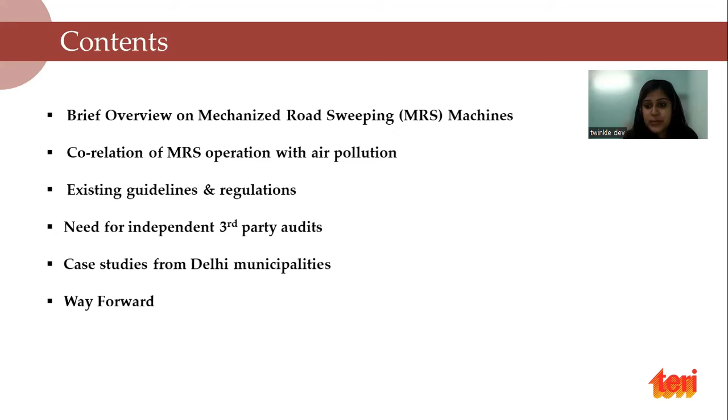So moving forward, the contents of the presentation have been highlighted in this slide. We will be talking in general about what exactly mechanized road sweeping machines are, how they are particularly designed, what things should be kept in mind by urban local bodies while deploying these machines on ground, and how these MRS machines are related to the air pollution aspect. We'll also cover existing guidelines and regulations in place for MRS machines, the need for such independent third party audits by municipalities, and case studies from Delhi municipalities as well.

The main objective of preparing this presentation was to sensitize all of the participants attending, to make them aware of what exactly a mechanized road sweeping machine is and how it operates, what parameters are kept in mind, and how it contributes in real sense to reducing air pollution from our environment.

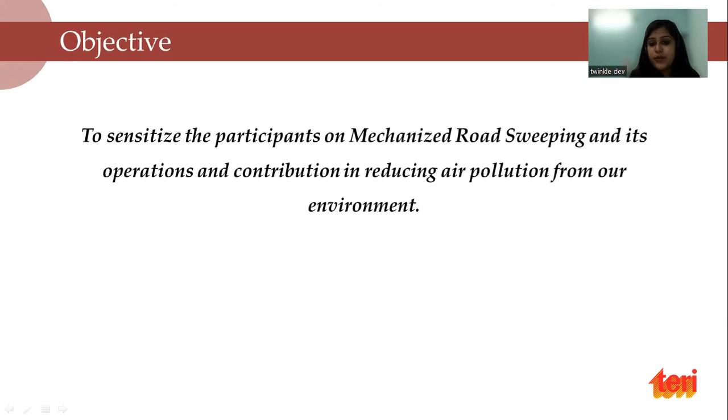So what exactly is a mechanized road sweeping machine? As you must have observed while traveling, you must have seen huge giant trucks moving on the road really very slowly, with a huge broom kind of thing below sweeping the road. These are nothing but the MRS machine, the mechanized road sweeping machine.

All these MRS machines are truck mounted and have vacuum suction engines, also known as auxiliary engines. Machines also have side and central brushes on the sides and in the front, and a few machines also have sprinklers present at the back, with the purpose of suppressing the dust during sweeping operations through water sprinklers. These machines are capable of sweeping one side or the central side of the road at a time.

So these machines are either operated with dry or wet sweeping mechanisms. The dry and wet sweeping mechanism machines have been divided into two types: one is of 4.5 cum of vacuum and the other is of 6.0 cum of vacuum. These are the dust holding capacities of these machines. The 6 cum is for machines doing dry sweeping, while 4.5 cum is for wet sweeping MRS machines.

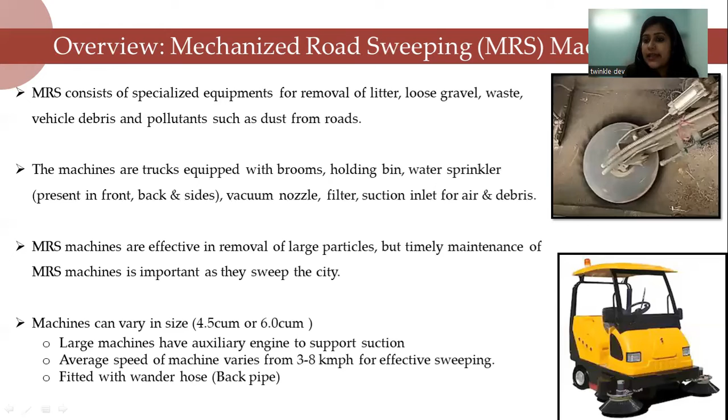So what is the correlation of mechanized road sweeping and air pollution? Dust pollution is a major cause of pollution, not just in India, but worldwide. In India, a huge percentage of pollution arises from road dust in the form of suspended particulate matter. Various sources of this air pollution or SPM originate from brick kilns, construction activities, transport, domestic waste burning, DG sets, etc.

In the era where mechanization and automation are new norms for urban services, due to increasing development and requirements on clean air, mechanization of road sweeping is going worldwide and in India as well. MRS machines are basically certified as PM10 efficient, capable of picking up greater than or equal to 80% of PM10 particles, which stir up from vehicular traffic on the paved roads.

Giving an example of Indore city in India, part of Madhya Pradesh state: it reported a drop of PM10 and PM2.5 by 8.3% to 5% in the year 2018 and 2019 due to the MRS operation only. The city also claimed that after using the MRS operation, the respirable suspended particulate matter also reduced in the city.

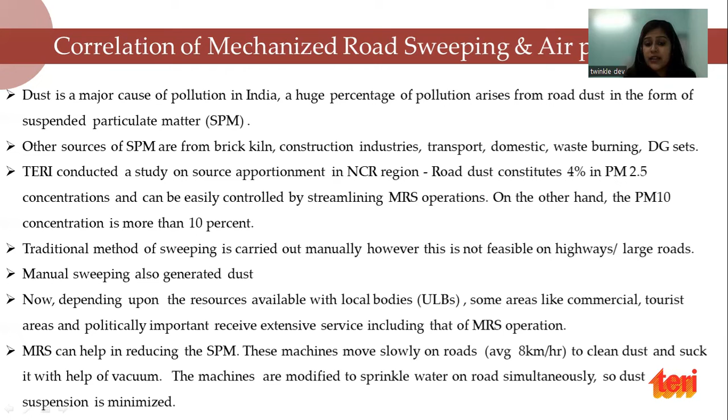So MRS can really help in reducing the SPM. The machines move slowly on the road to clean the dust and suck it with the help of a vacuum. Hence, I think MRS should be deployed by the municipalities on ground.

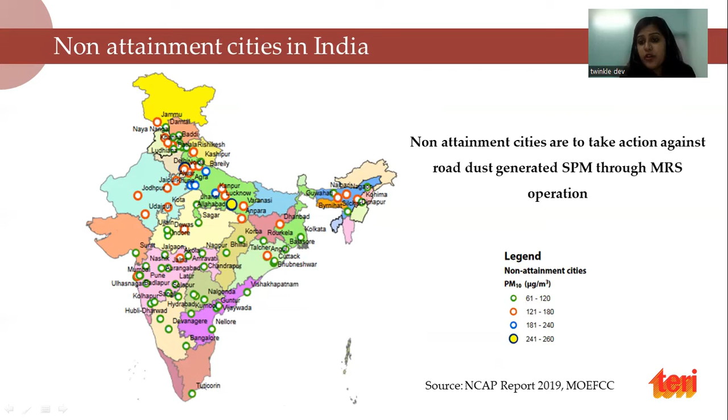What I think is, non-attainment cities should take action against the road dust generated through various different activities, and MRS operation would be a really feasible option. There are certain NCAP action points for pollution from road dust and C&D waste, such as introducing mechanical sweeping on the basis of feasibility studies in the city. So urban local bodies, whenever they are going to introduce their mechanical sweepers on ground, need to come up with a feasibility study to understand the challenges they might face while operating their MRS on ground.

Suppose there are challenges like unpaved roads, and since these machines are really very costly, they might face regular breakdown during their shift hours. So it's really important that municipalities understand certain challenges, whether related to paving of roads, getting diesel on time, or designing routes so dead mileage is reduced, so that these machines can be used to their optimum value and perform to their fullest, helping undertake sweeping operations more effectively.

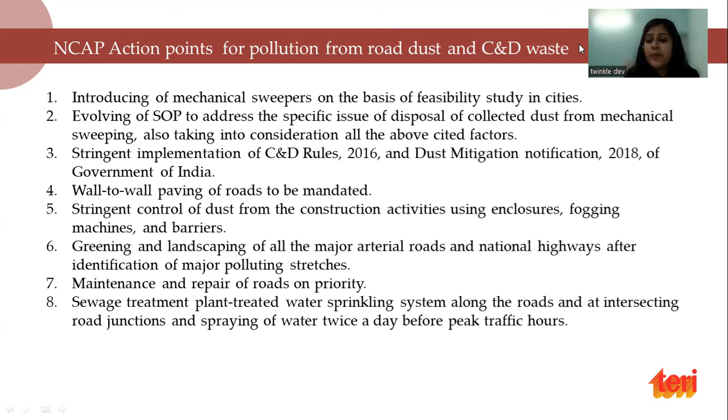There are certain design characteristics of MRS machines which need to be kept in mind, because most of these machines are operated by a driver along with operators who are present with the machine. So the human factor needs to be considered, wherein these machines should be designed with a proper cabin where both the driver and the operator are able to sit properly.

There should be presence of light, because the MRS operates not only during the day but also during night shift hours, so proper lights should be present inside the cabin, and the presence of all lights outside the MRS should also be there.

Functional requirements are also really very important, because whenever the MRS machine breaks down, it should have a certain toolkit with it so operators are able to at least work over the issues while the machine is on breakdown. A toolbox or other things need to be provided along with a fire extinguisher kit for the MRS machine.

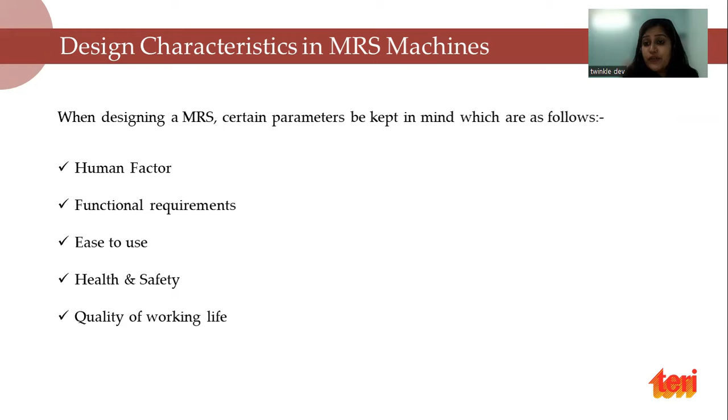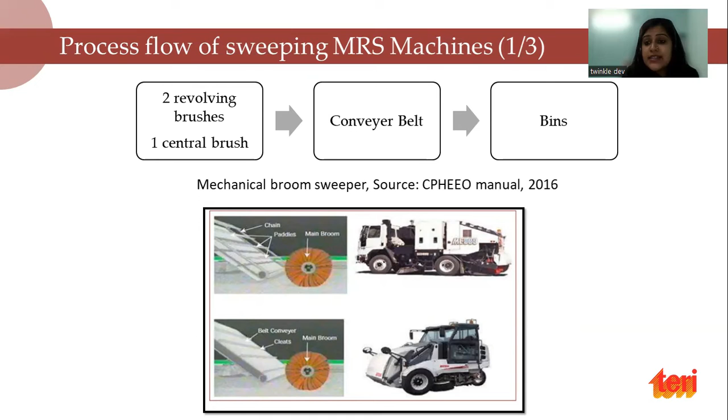In the MRS machine, you can see two revolving brushes and one central brush. One revolving brush is on the right, one on the left, and one in the center. A conveyor belt is present that helps in moving these brushes and also the vacuum, which collects the dust and transports it to the bins.

So what exactly is the working of an MRS machine? MRS, as you know, is a truck mounted sweeper, usually mounted on a truck for its primary movement. Most of the function of the sweeping unit is controlled by an auxiliary engine, as highlighted earlier, responsible for powering the broom and vacuum functions.

During the entire operation, the side and central brushes move the sand and debris closer towards the suction head, which picks up all the debris and collects the dust in the hopper.

The hopper is present at the back. It is a metallic body of the truck, and it opens up at 90 degrees with a hydraulic locking system in place. The controls present inside the cabin make it a really safe and easy system to operate.

The challenging part of suspending the dust on the surface is taken care of by the water sprinklers, which help in suspending the dust on the ground so that it gets easily collected.

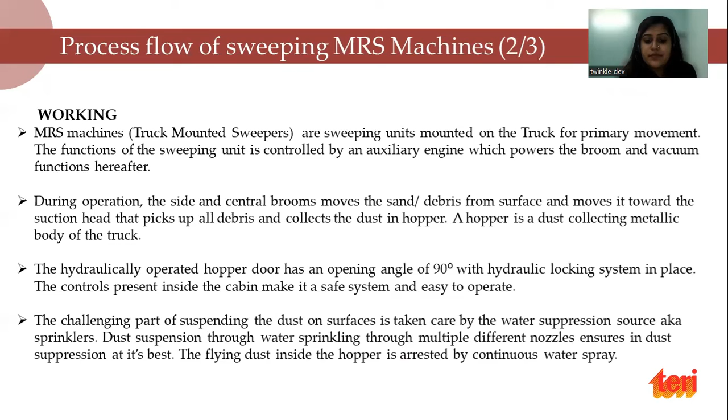The MRS machine has one main broom with excellent sweeping performance every time, and two free floating suction hoods on either side, with the choice of operating any hood independently or both simultaneously. Safety parameters are kept in mind while designing these machines.

The vehicle possesses a hopper load holding valve in addition to the manual safety lock measures. It is also equipped with a high pressure water jet.

The water jet basically helps in cleaning signboards, monuments, paver blocks on walking tracks, barricades, and sometimes when the dust is unloaded at a disposal site, this water jet is really very helpful in cleaning that hopper from inside.

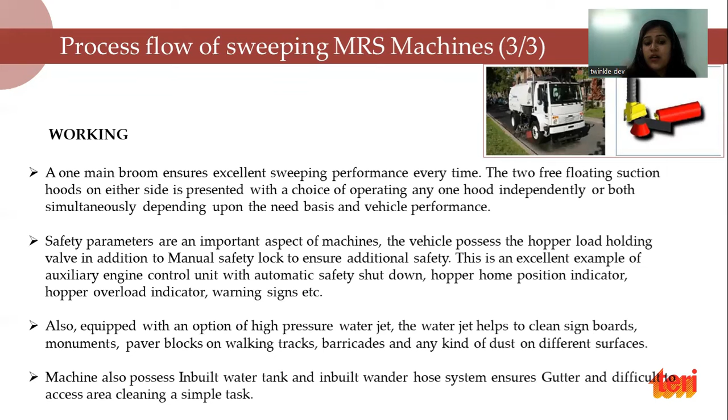The machine also possesses an inbuilt water tank and inbuilt wander hose system that ensures gutters and difficult areas are also cleaned very easily.

There are two types of vacuum sweepers available in the Indian market: one is the chassis mounted MRS, and the other is the self-propelled MRS.

The chassis mounted MRS machine is a power sweeping unit with a container mounted on a vehicular chassis, having hydraulic motors and power controls for driving the brush, suction unit, and jet washing, with an auxiliary engine driving the vehicle. It has a payload capacity ranging between 4,000 to 5,000 kg, with a 4 to 6 meter cube stainless steel or higher grade container for storage of sweeping waste.

On the other hand, the self-propelled one is a self-driven power sweeping machine, a composite vehicle with a container, hydraulic motor, and power control for driving the brushes, suction unit, and jet washing. It has a payload capacity ranging between 2,000 to 3,000 kg in a container of 1.75 to 2.50 meter cube. This is a relatively small machine that can be deployed on both narrow and wide roads.

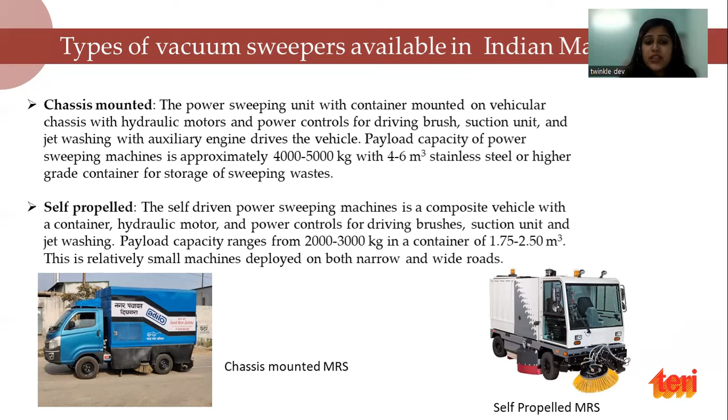It has the advantage that it can move on both narrow and wide roads, while the chassis mounted type is usually used on long and wide roads.

Why exactly is MRS machine sweeping operation required? As per a study conducted by the Center for Science and Environment in 2016, we observed a bifurcation of different sources of air pollution, and road dust in cities accounted for about 38% of the pollution originating from road dust.

This brings us to the point that air pollution is really impacting every aspect of our environment. It's really very important to act upon it, and mechanical sweeping operation is considered one of the most feasible options to do that, as dust gets accumulated on central side verges of the road.

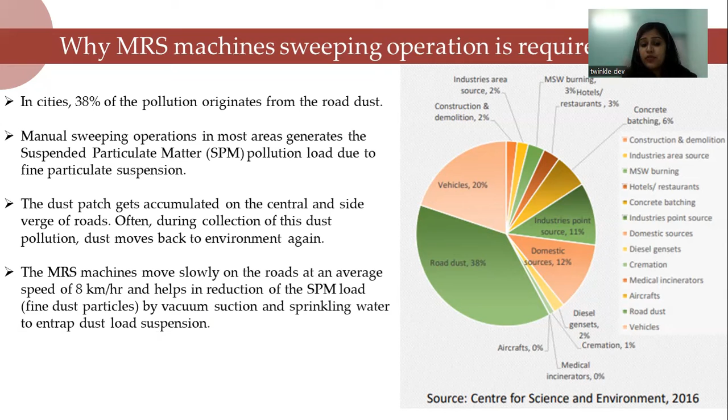Often during collection of this dust it gets moved back. So it's really important that with the help of the MRS machine, this dust is suspended rather than moved back into the environment, so it gets easily collected.

These are some CPHEEO guidelines for urban local bodies and also for the manufacturers.

It's really very important to adjust the frequency of street cleaning by urban local bodies, because geographically speaking, every area or every municipality would be having a different condition from the rest of the municipalities.

It is the municipality's job to actually determine which areas require immediate attention. For instance, residential areas would require sweeping on a daily basis, but market areas or areas where there is no significant dust generation would not require as much street sweeping.

Based on the geography of any area, first the urban local bodies should come up with their own set of frequency of cleaning the streets. Then urban local bodies also need to ensure the safety of workers that are being engaged with the MRS operation.

Most of the time these MRS machines are encouraged to be swept in 2 shift hours, so during the night time it becomes really difficult for the workers, as sometimes the roads provided for sweeping are not fully accessed with electricity or power. So workers should be provided with personal protective gears including belt jackets, reflective jackets, hand gloves, earplugs, boots, and proper uniforms. ID and health cards should be given to them as well.

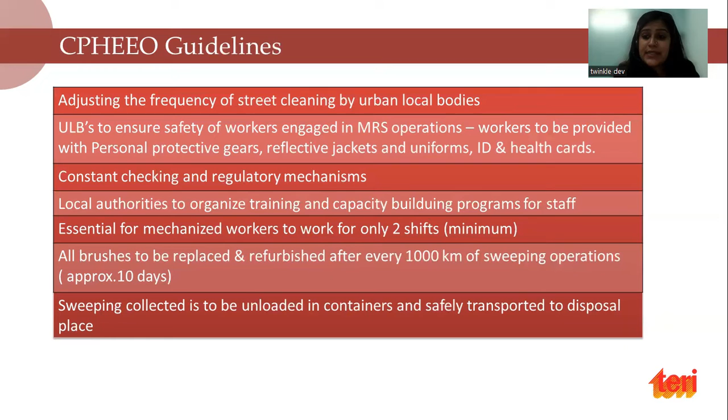This is the suggested sweeping frequency that came in the SWM Rules 2016, and this is the frequency that urban local bodies should follow. But as I told you earlier, geographically speaking, every municipality will have different challenges and situations. So based on that, each municipality should take on the task of curating their own set of sweeping frequency based on the situations they are actually facing.

This can be taken as an example, and they can develop over this. For instance, city center shopping areas would require daily or twice daily sweeping, while market areas, minor streets, suburban shopping streets, or residential streets might require sweeping on a day-to-day basis. Roads or streets with no households or establishments on either side may require it once a week. Highways rarely need sweeping, as motor traffic creates turbulence. Suburban main streets twice a week, and open spaces occasionally whenever required.

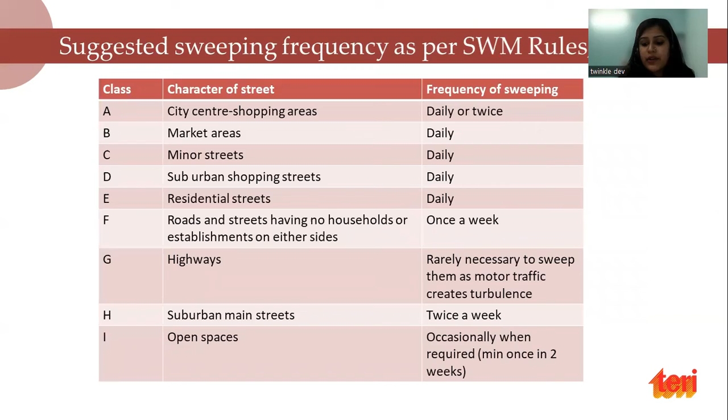MRS machines are usually for cleaner and safer roads. In India, civic bodies face a lot of challenges while operating these machines on ground. The dust that gets collected near the central median and on the side of the road is a major threat to two-wheeler riders moving on ground. In order to sweep this accumulated dust, urban local bodies should engage municipal workers who manually sweep the road. However, constant movement of vehicles dissolves the mounds back into the environment, and emissions of PM10 and PM2.5 happen during that process.

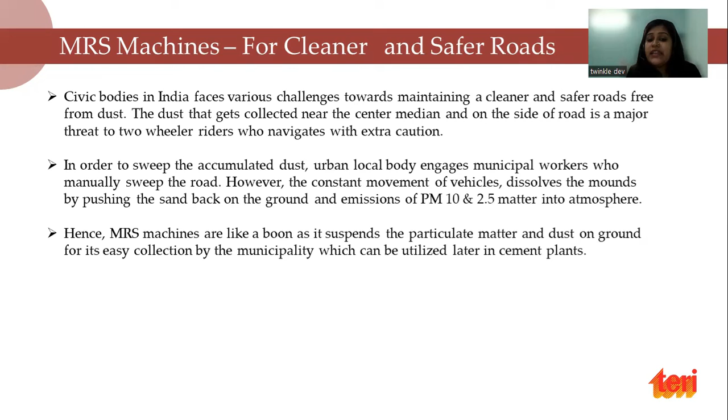Hence, MRS machines are like a boon, as they suspend the particulate matter on the ground and it gets collected very easily, so it can be utilized later in cement plants. There is a need for MRS audits, as it efficiently removes fine road dust. It's beneficial for main busy roads, can reach inaccessible places using a wander hose, can pick up large debris, is effective in removing packed dirt from roads, contributes in preventing air pollution, and is helpful in clearing heavy dust loads.

As you can see on the right side of this picture, this is the back hose pipe. This can be helpful where the roads are really very small and it's difficult for the MRS to reach. These long pipes can reach there and collect the dust.

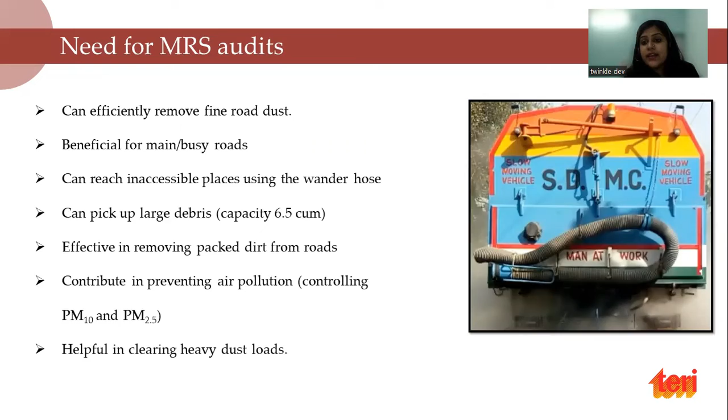What are the operational conditions that need to be kept or considered during sweeping? The mechanized sweeping machines should work in 2 shifts minimum, to basically ensure economic viability and also maintain these vehicles. One skilled operator and one semi-skilled co-operator are required to operate the mechanized sweeper.

Because sometimes when the MRS machine is moving, it might face certain challenges where the driver has to come out of the machine, go back, and remove large chunks of boulders. That's when the operator can chip in and help in removing these big boulders.

The machine is unable to clean all the odd and uneven places, so these manual sweepers would help in moving the back pipe to places where the machine is unable to reach. The typical fuel efficiency of these MRS would be around 1.5 to 2 kilometers per liter.

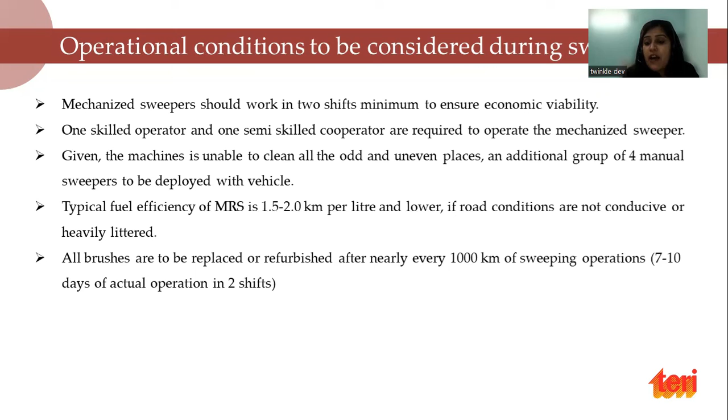And lower if the road condition is not conducive or heavily littered. All brushes are to be placed, replaced, or refurbished after every 1000 kilometers of sweeping operation.

What are the financial implications of mechanized street cleaning? The total cost of mechanized street sweeping includes the purchase cost of the machine, the annual cost of operation and maintenance, the cost of disposing the debris, the wages of drivers and helpers, and it's necessary to consider efficiency, average life, and availability of spare parts.

And the presence of authorized garages and personnel for maintenance of these machines.

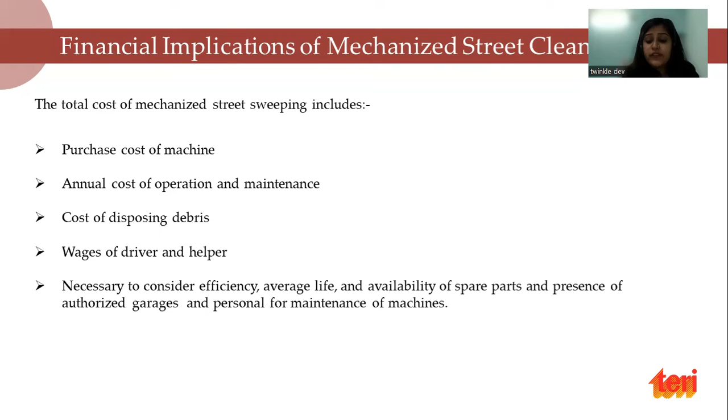Case study from India, case study from Delhi: independent waste audits by TERI. The main objective of coming up with these independent waste audits in Delhi was to conduct an independent monitoring of the MRS machines in the 4 corporations of Delhi, which are SDMC (South Delhi Municipal Corporation), East Delhi Municipal Corporation, North Delhi Municipal Corporation, and New Delhi Municipal Corporation, and to help these urban local bodies improve their existing MRS operation activities.

We took into consideration and ensured that regulatory compliances were being met, compared the current practices to the benchmark level, generated the baseline data, reviewed the existing practices of these urban local bodies, and established indicators and targets.

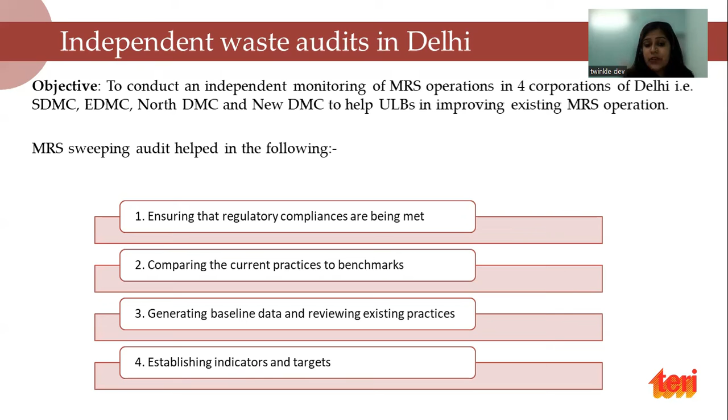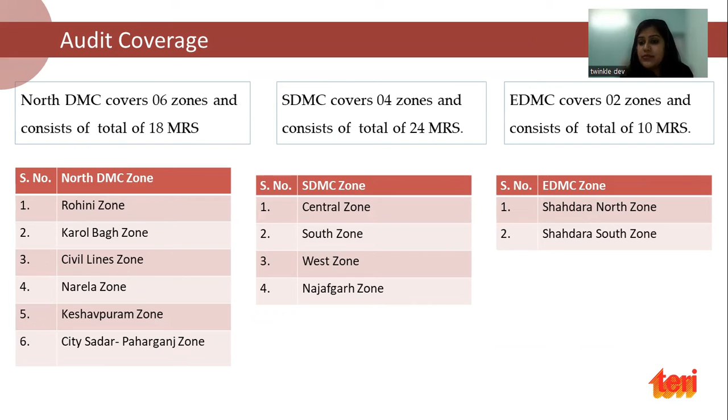Audit coverage included North DMC covering 6 zones - Rohini, Karol Bagh, Civil Lines, Narela, Keshavpuram, and City, Sadar, Paharganj zones - consisting of 18 MRS. SDMC covered 4 zones - Central, South, West, and Najafgarh zones - with about 24 MRS. EDMC had 2 zones, Shahdara North and Shahdara South, consisting of 10 MRS.

This was the assessment methodology we followed to conduct the assessment. Phase one was the pre-audit phase, wherein we collected basic information from urban local bodies. Relevant stakeholders were mapped who were involved in managing these MRS machines and people actually working on ground. A questionnaire was prepared keeping in mind all these parameters and activities, and an in-depth literature review and checklist was prepared for conducting the on-site audit.

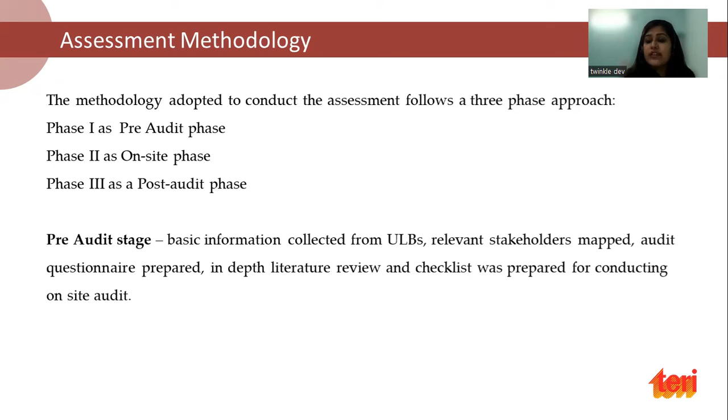Under the on-site audit stage, we also did extensive monitoring of MRS operations by the TERI auditing team working on the ground, and route maps were reviewed to understand which routes generate the most amount of waste and which routes require little attention because they don't generate a lot of dust.

A complete organizational operating mechanism was also introduced, covering brush broom status, throughput of the MRS sweeping machine per hour, status and stake of sanitary supervisors, understanding of MRS operation, status of the machine and maintenance, collection disposal mechanism, route selection mechanism, gaps in sweeping operation, and status of machine operators.

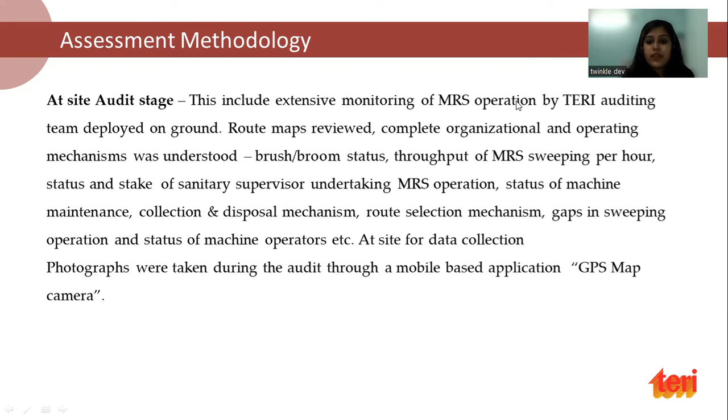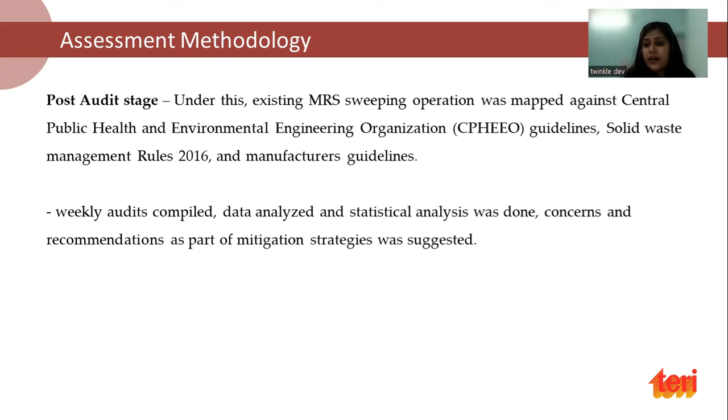Under the post-audit stage, existing MRS sweeping operations were mapped using the CPHEEO guidelines, solid waste management rules, and manufacturer guidelines. We used to prepare weekly audit reports that went out to the urban local bodies. Later, when the project was in its final stage, we sent the compiled set of weekly audit reports, and the data was analyzed using statistics. Various issues and concerns were highlighted, and recommendations were given as part of mitigation strategies that urban local bodies can follow to improve their MRS operations.

What were the major areas of concern we encountered during the study? There is a need for appropriate route planning, because sweeping routes should be planned with correct kilometers mentioned and sites matching the targets. This will avoid the vehicle standing idle after sweeping.

It should also be carefully observed that the same routes are not allocated to two vehicles at the same time. Municipalities should ensure that unauthorized parking does not hinder side sweeping, and only roads with side pavements should be selected for side sweeping while making the route plan.

Routes should be planned so that the starting point of sweeping is not very far from the depot, and the sweeping operation should always end near the dumping yard to save travel time and distance. Circular routes should also be built by the municipality itself.

Broken roads and heavy dust roads must be identified in advance, and proper maintenance needs to be carried out to make these roads usable for MRS operation, since ineffective sweeping depletes both the sweeping quantity and quality.

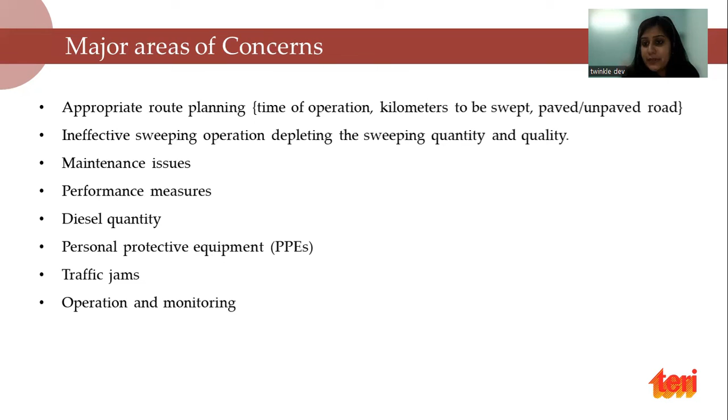To avoid traffic jams, municipalities should design their shift hour timing in the early hours of the day or during night time. Personal protective equipment should be provided to all operators deployed on the MRS machine, and also to the drivers.

There are certain remedial measures regarding these MRS. The concerned department should be directed to repair the roads so proper infrastructure is made available for carrying out effective sweeping. There's a need to come up with an appropriate mechanism for monitoring the target and quality of sweeping. Water and diesel should be timely provided to the MRS machines, before or after the shift, and water refilling of the tank should be done if required, using reused water where possible.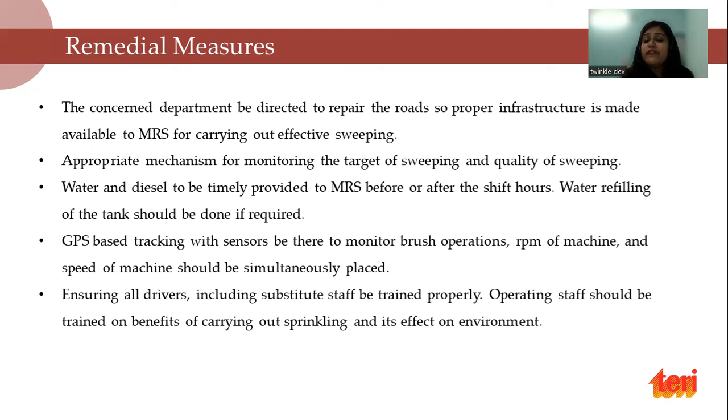A GPS based tracking system with sensors should be there to monitor the brush operation, RPM of machine, and speed of machine. All drivers, including substitute staff, should be trained properly, and operating staff should be trained on the benefits of carrying out sprinkling and its effect on the environment.

This is a picture from the Times of India showing the urban local bodies' sweeping efforts. The North Corporation is represented by red color, East by green, and South by blue. As you can see, the corporations deployed MRS on ground, among other measures, to check dust pollution, and road length covered and manual sweepers have been highlighted in the picture.

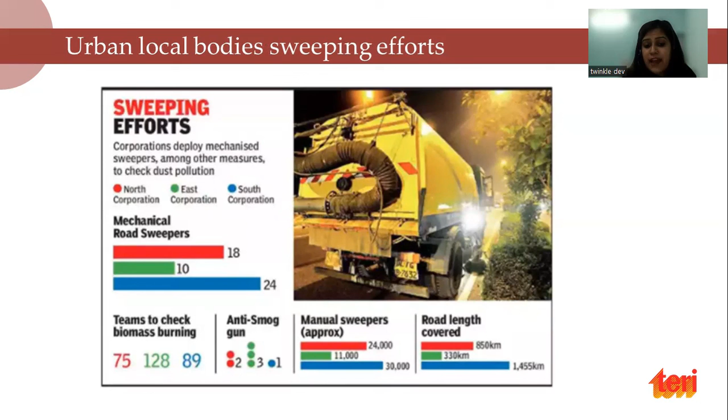Moving forward, we have good practices from all these municipalities. In this picture, you can see effective sweeping observations. On the left side you can see the road is dirty, while on the right side you can see that it is much cleaner.

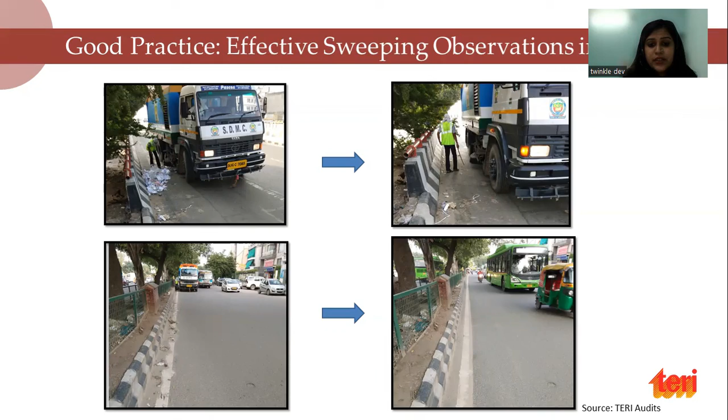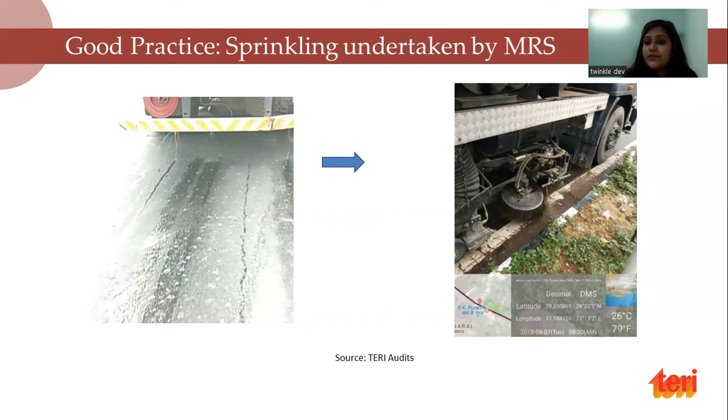Good practice of sprinkling being undertaken by the MRS. Sprinklers are being used either on the back side of the MRS vehicle or on the sides. This really helps in curbing down and suspending the dust particles on the ground so that it gets easily collected. Good practice of SDMC by coming up with a mechanical sweeping dashboard.

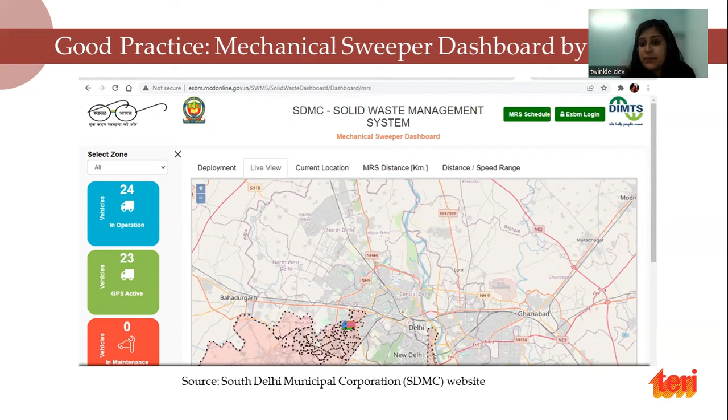Here you can see that on the left side, 24 vehicles are in operation, 23 vehicles are under GPS control, and they are active. The GPS is active on the 23 vehicles.

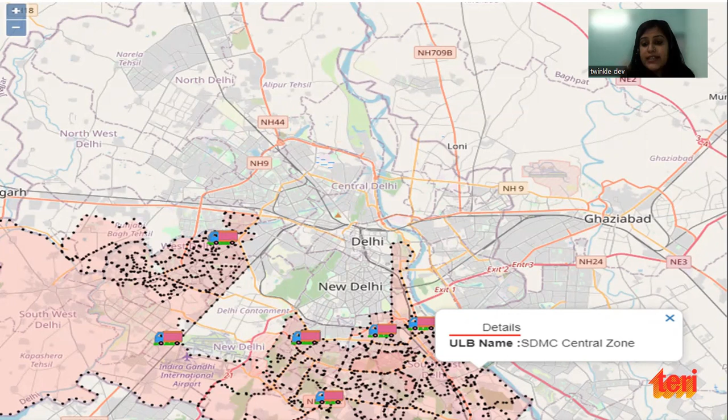Moving forward, you can see that SDMC is able to see and track where all these MRS machines are actually moving. And if they are not moving, then the particular supervisor can call the driver on ground and check with him what exactly is the issue with that particular MRS.

So what are the suggestions for the urban local body? MRS machines, as you know, are very costly and require day-to-day maintenance. Hence, ULBs should deploy organizations or companies like TERI to undertake independent audits on a regular basis to prevent bad practice and reduce dead mileage during operation. Independent audits will ensure that all maintenance operations and issues get resolved at the earliest without any delay, which clearly enhances the overall performance of the vehicle when plying on ground.

MRS sweeping should be slow so dust gets collected, and sprinklers should be used at all times for dust suspension, with the sprinkling nozzle adjusted accordingly. Petrol carts should be made available to ease the refilling of diesel.